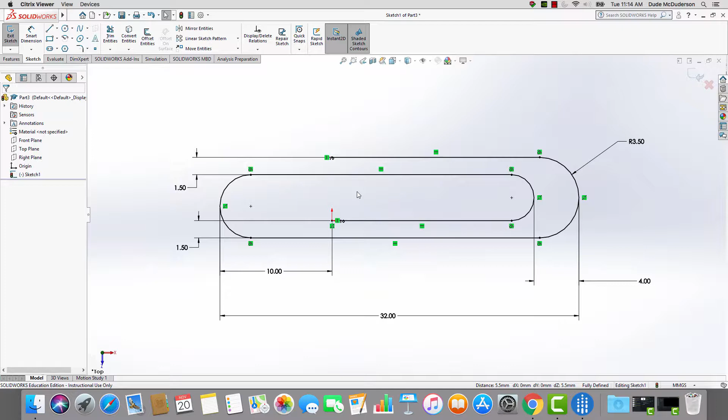Let's go ahead now and take a look at the second sketch. Our second sketch in this particular model is a very, very simple one. It's just a circle. The key here is that this circle has to be on a plane that's perpendicular to the path. And that's because we're going to take this circle and extrude it along this path. That's a really important step.

And before we even start any of the sketches, we want to make sure that we understand this relationship. So that's why the origin here is so key. Being able to deposit that circle right at the end point, the center of that circle at the end point of our path, is very important.

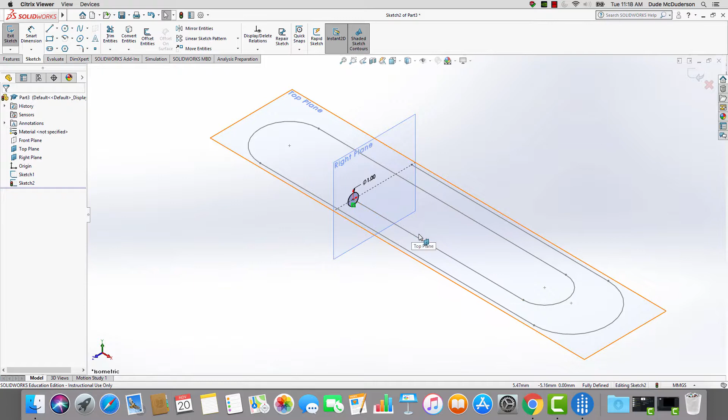So from the onset, I knew that I would be generating this sketch. That's why I started the path at that point, and I did that on the top plane. So now we have this intersecting right plane that gives us that perpendicular profile to follow along. The profile here is just the cross-sectional geometry of the paperclip, which happens to be a circle. And it's that profile that will be extruded along the path to create this solid body.

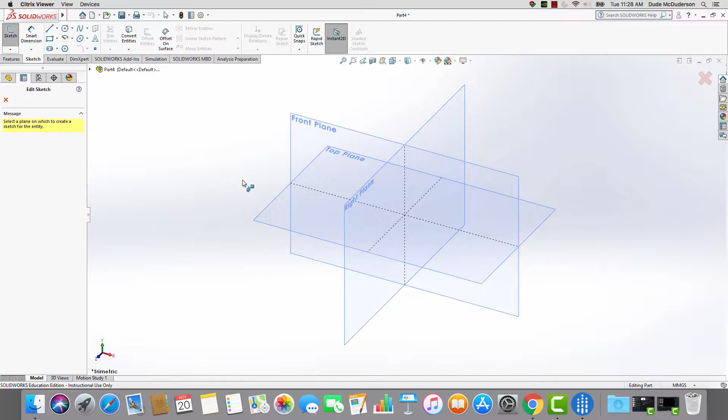Let's get started drawing our paperclip. So in SolidWorks, I've opened up a new file and I've changed my units to mmgs, millimeters, grams, seconds. Now I'm going to start, like all SolidWorks drawings, with a sketch. So I click the sketch tab, I click the sketch button, and I want my paperclip to sit on the ground, so I'm going to create the path here on the top plane.

So I select the top plane, and now I'm going to invoke the line tool. Click on line tool, I'm going to click at the origin point, and I'm going to pull a line horizontal. The key with this is we're going to do this all with one line command. So after I've drawn that line and I've clicked that second point, before I move my mouse at all, I'm going to type A on the keyboard.

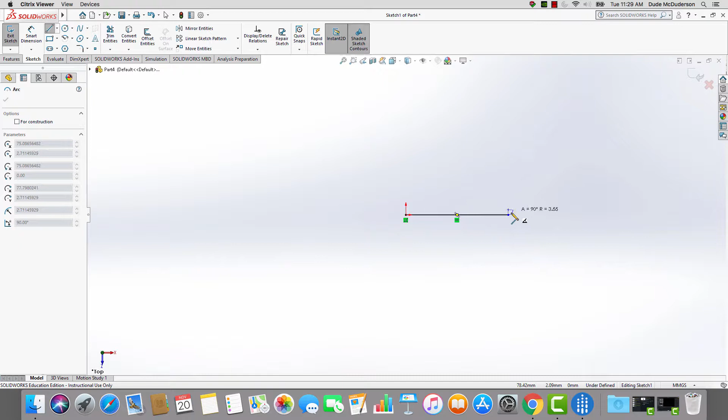What that's going to do is move to a tangent arc, and I want to sketch. I'm not actually clicking anything. I've clicked and let go. But I want to pull that arc along a path, because if you go back to the center point and I just pull out like this, it's going to start an arc that looks different from how I want it to look. So what I need to do is tell SolidWorks, I want this arc to go like this. I do that.

I bring that arc up until I see that blue dotted connector line. I click. I pull that line out and nice horizontal. I click. Before I move the mouse, I type A again, and I sketch out the direction of that arc until I see that blue connection point. Click and pull away.

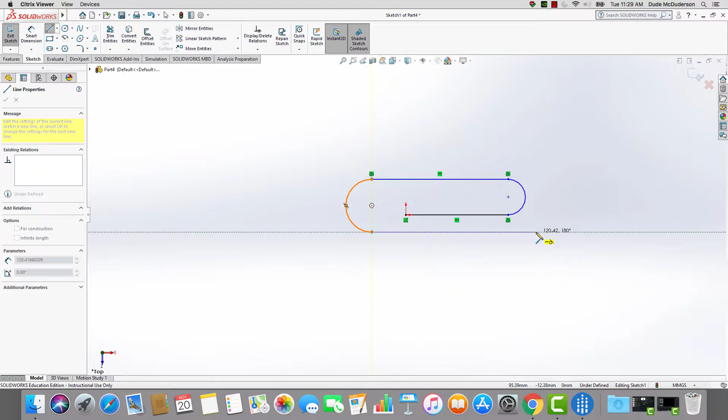Another horizontal line. I'm going to go past that arc at the end. Click. I'm going to type A yet again without moving the mouse, and I'm going to sketch this guy out.

Now, again, I really want that blue connector line between, but I'm going to show you what happens if I miss that. You'll notice that I don't see that blue extension line.

I'm going to move it back just a little bit, click, and pull out my line from there, another horizontal line. I see that blue connector line connecting it, the extension line connecting it to the origin, so I'm going to click to position it there, and hit escape to get out of the line command.

So looking at this, you'll notice that we have all of these horizontal lines. That's good. We have tangent, tangent, tangent, tangent, tangent. Oops, no tangent here. I don't have a tangent here because I didn't pull that point till I saw the blue extension line, so that won't make that a tangent connection.

I did that on purpose because I want to show you now how to create a relationship where one might not exist. To do that, it's actually quite simple. Make sure that no tool is active, so you don't have the line command or dimension tool, and simply click the two things you want to create a relationship between.

So in this case, I'm going to click this top line, hold down the control key, and click the arc. The control just allows me to select more than one object. When I do that, it pops up this little menu above my mouse, and you'll see all of the potential relationships that you can add.

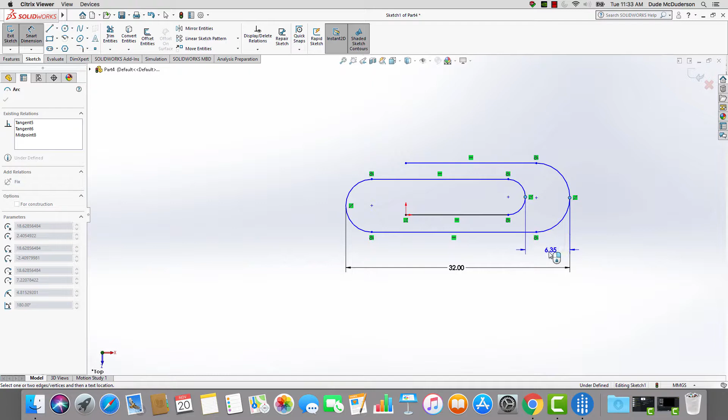We're going to do the same sort of thing here. I'm going to select the origin point, and this time that midpoint on the arc, and that's going to give me that distance between those two, which in this case happens to be 10.

So those are the complicated dimensions, things that we haven't done in past tutorials using that midpoint on the arc. You can also dimension to midpoint of lines if you want to.

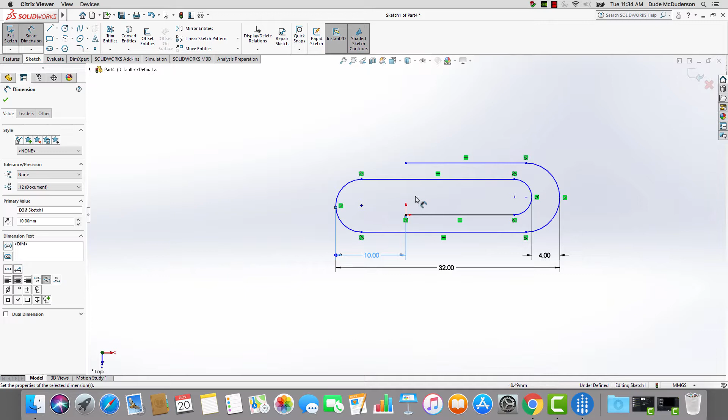The extra dimensions here: we have a dimension between the first line we drew and the bottom line, and that has a distance of 1.5 millimeters. That same distance exists between these top two, so I select this line and this line. I'm going to dimension between those, and I want those to be 1.5 as well.

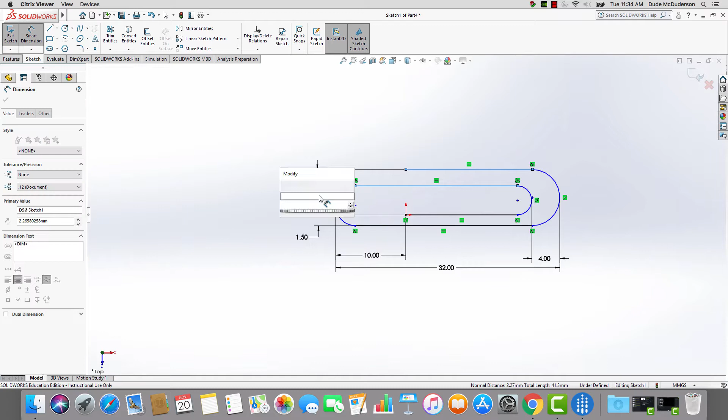With that, you'll see that I still have a lot of blue lines. If I hit escape to get out of the dimension tool, I can start to grab these arcs and try to move them around and see, oh yeah, this really does change. So I need to add at least a couple more dimensions to lock this in.

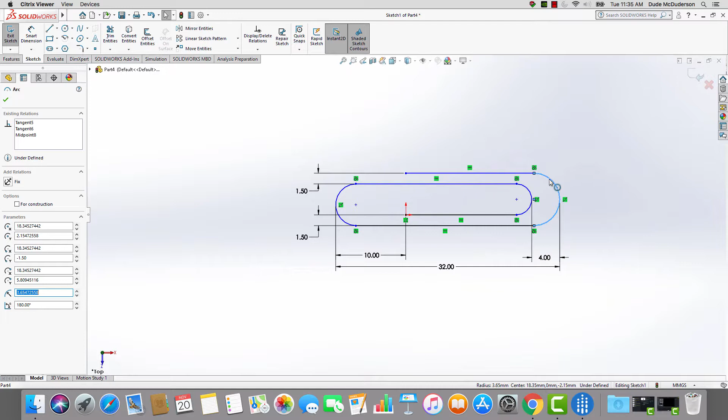The last big missing dimension is actually a radius on one of these curves, and we're going to use this outside curve. So I'm going to invoke the Smart Dimension tool again, click on this outside curve, and I'm going to do a radius of 3.5 millimeters here.

And you'll notice that one dimension turns all of those lines from blue to black. So it was really that outstanding one.

Now, if you're paying close attention to our model here, everything looks like it's black and it says underdefined, but if you're really paying attention, you'll notice the endpoint here is blue. Again, if I get out of the dimension tool and I click on that line, it's blue because I can move this back and forth, in or out, longer or smaller.

So we could add a second dimension from that point to this edge and make it 10, because it should line up with this point. Typically, when you dimension the same value twice in a drawing in SolidWorks, there's probably a better way to do it.

In this case, the better way is rather than dimension this point, create a relationship between this point and that point. We've already shown how to do that. That point's selected, I'm going to hold down Control, select my origin point, and then come over here, and these are the relationship choices I have: horizontal, vertical, fixed, or merge.

I clearly don't want to merge those two points. I also don't want to fix them. I don't want them horizontal to one another. Vertical is the proper option here. So I select vertical, and I hit the checkbox. Once I do that, that point turns black, and we now have a fully defined object.

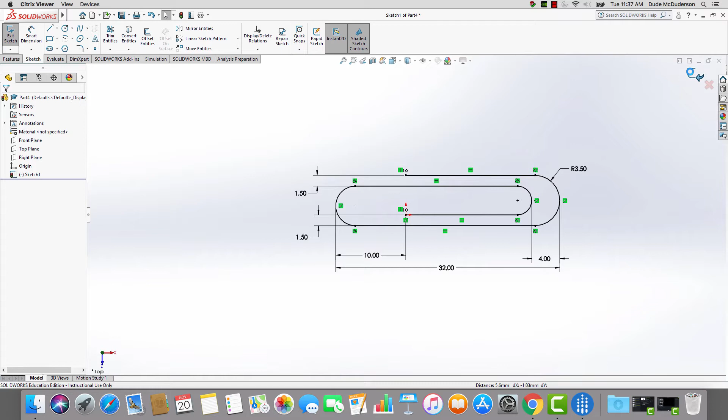Now, as I mentioned, we have to have two separate sketches for our paperclip model. One has to be on the top plane. The next one we want to be on a plane that's perpendicular to that top plane. If you don't know which one that is, you can always scroll through them on the left. They show up here. So front plane, that's not perpendicular to that point.

Top plane, that's what we drew it on already. The right plane is the proper plane that we want to draw on. So with that, I'm now going to go up and create a second sketch.

Here's the key to this little exercise, something that people miss quite easily. Because sketch 1 is highlighted here in my history, if I click the sketch button, it's not going to create a new sketch—it's simply going to open up that existing sketch. I don't want to open up that existing sketch. This sketch is done, so I'm going to exit that sketch.

And I'm going to make sure that no sketch is highlighted by hitting the escape key to deselect that sketch.

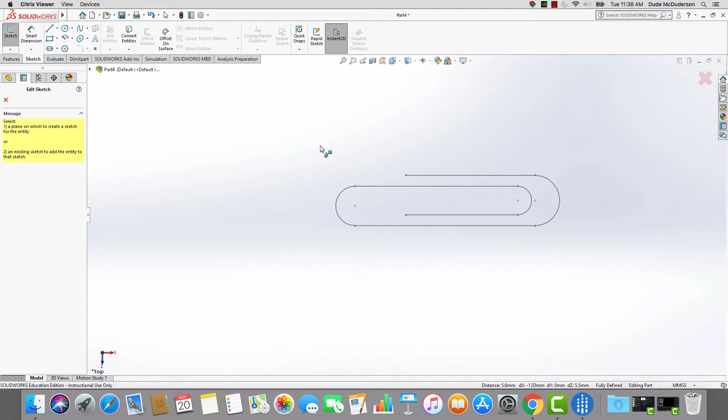Now I can go up to click the sketch button to initiate a new sketch. Here, those stock planes don't show up. How will I choose that right plane, which I've already determined I need? Well, to get to those, we haven't really explored this, but up here in the top left corner of your drawing window, where it says Part 4, because this is the 4th thing I've drawn today, if I click on that little arrow next to it,

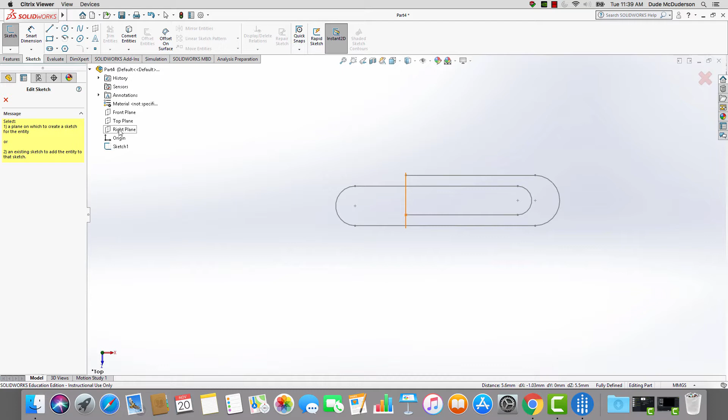it brings up my design history, and you can go in and select any of those previous things you've dealt with in your design history. So this is a great way to make selections of features when you don't have your design tree up. You can just click that little arrow and expose them. And here, again, I'm going to choose the right plane for that sketch. So I choose the right plane.

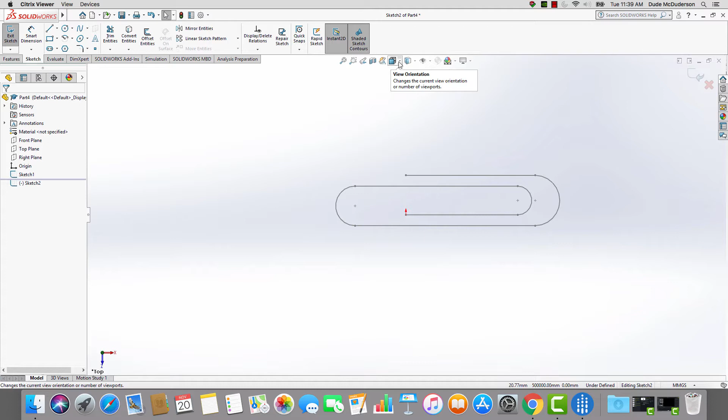SolidWorks hasn't orbited that plane normal to my drawing surface, and with this particular example, I don't really want to go normal to that drawing surface because I want to be able to show you the perpendicular nature of this sketch. So I'm going to click my view orientation, and I'm just going to go to the isometric here, and I can zoom in, and we're going to go to the center circle option. The center of my circle is going to be positioned at the origin point. So I click that and pull away.

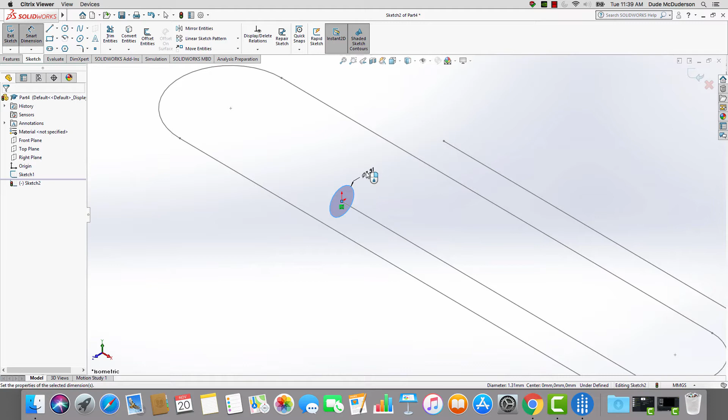I move to my Smart Dimension tool, and I'm going to dimension the outside edge of that circle. And this wants to have a diameter of 1. So I simply type in 1 and hit enter, and that locks in that thing. Again, this sketch is now fully defined. It's black. There's nothing else we need to do to it, so I can go ahead and exit the sketch.

So I've exited the sketch. My two sketches are now visible. One is currently highlighted. Make sure you have two sketches over here in your design history. At this stage, we're ready to do our sweep. So I'm going to move over to the Features tab, and instead of an extrude or revolve, I now go to the Swept Boss Base. Click on Swept Boss Base, and the menu pops up.

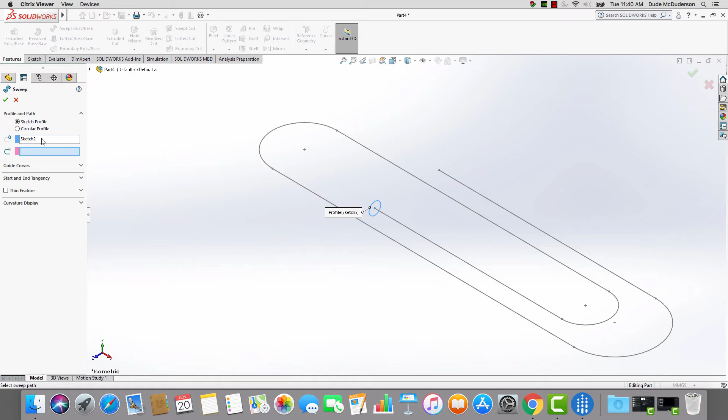Because of the nature of how you typically draw in SolidWorks, it usually takes whatever your last sketch was and makes that the profile. It's just what SolidWorks does. If for some reason that's not correct, you can always right-click on that and do clear selections, and you'll notice that that's now highlighted blue, and I can go in and select that profile. This second box here is the path. It's asking you to indicate the path. So because it's highlighted blue, it's now asking for a selection set.

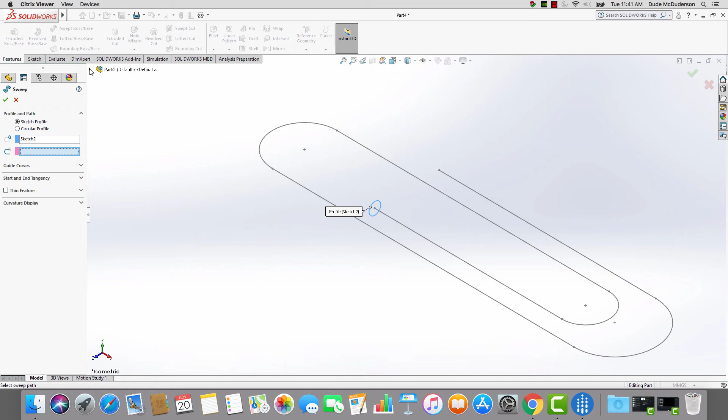I could either go in here and choose any line on that path, or like we did with that plane, I can click the little arrow to expose that, and I can choose sketch one. Either one is an option. I like just going over here and choosing a line on that path. It then does that sweep for me. If I'm happy with it, which I am, I can go ahead and hit the checkbox.

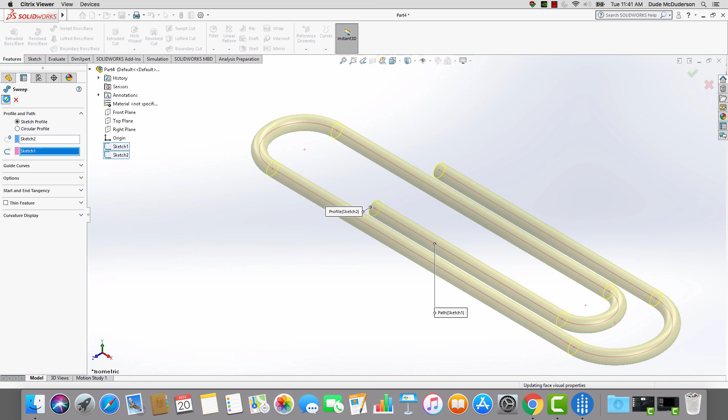You'll notice there's a lot of other options here. All these things that make SolidWorks really powerful. You can do guide curves so that instead of this just staying at a constant diameter, you can actually make it go in or out or get larger. There's a great exercise where you make the bell of a trumpet that way, by creating a guide curve that bell follows. But in this case, the paperclip, it just keeps that same profile all the way through, so there's no reason to add any of those other things. I'm going to hit the green check mark, and lo and behold, we have created our paperclip.

That concludes our exercise number 4. Hopefully you found this helpful and it gives you another tool in your arsenal as you approach solid modeling using SolidWorks.